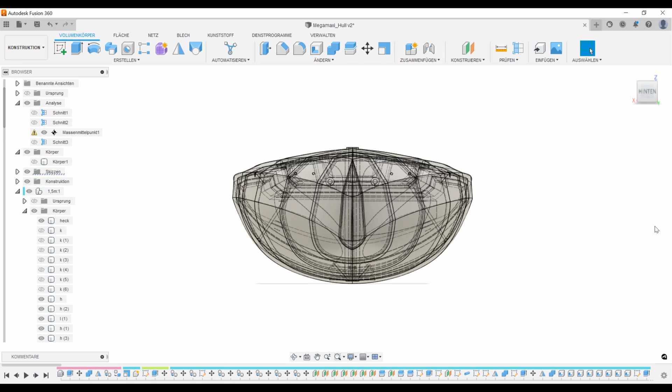In this video I will go into detail of a smaller scale version of the Klassen 180 at 1.5 meter length, ready for 3D printing on a regular 350mm diagonal 3D printer. I will go into detail how to calculate the displacement of this hull and what to look for in a perfect 3D print.

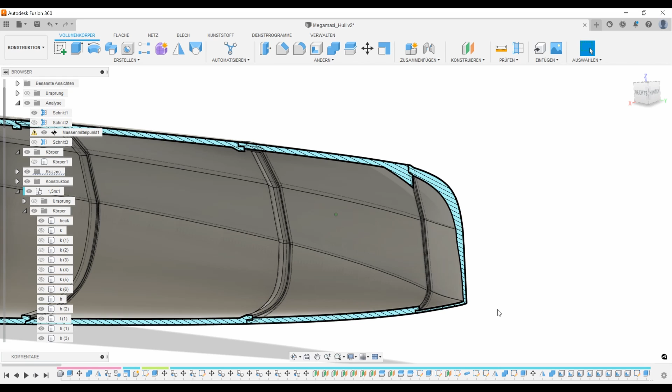I had rigidity in mind, so the bow section is a little thinner so we can backfill with a composite, like epoxy putty or something with fibers included. I want everything to be super easy to print and super easy to assemble, so the second section fits perfectly into the bow section. We can then bond a plate onto this surface, which gives us the security of a crash bulkhead. Further down the hull, I've addressed the common issue of overhangs by adding a little chamfer onto our bonding area.

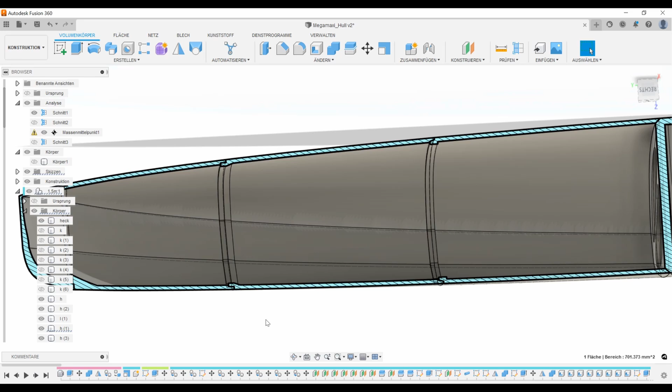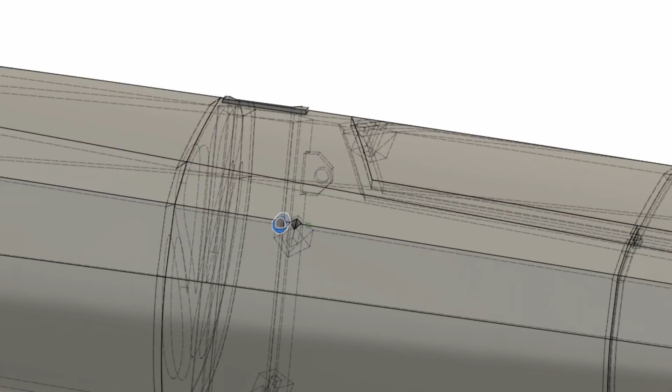The next section of the hull bonds to the main structure with a main bulkhead where the mast sits, and we have a little different connection. Also added are these round and square tubes to insert carbon fiber rods and tubes, which will later give us enormous rigidity for this hull. These protruding areas also act as mounting points for the hardware for the stays. This main bulkhead and the stay area indicate that we are in the middle of the boat.

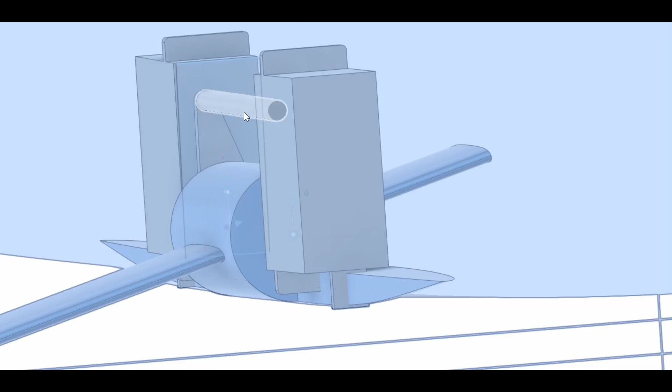A little frustrated from other designs, I thought let's give this boat a flat surface where we can mount every keel option out there. This flat surface, ready for mounting every keel option out there, should give us the opportunity to develop canting keel systems and put higher and higher loads onto those hulls.

Speaking of load distribution, just in front of the main sheet post we have these three posts that support the deck structure from shifting left to right. On top of the deck we also have a recess where we can place a carbon fiber plate to further reinforce the deck structure in this area.

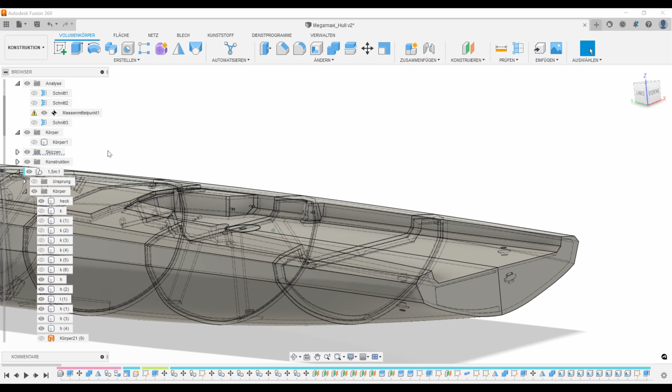Coming from the main sheet, we go to the steering system. In the rear of the boat we have two holes ready for the rudder stocks. Twin rudders? Yes, because it looks good. We can add T-foils to the rudders because this boat is supposed to foil. Some experience and the help of computer-aided design gives me the chance to already include the penetrations into the 3D model that we'll need for the steering system.

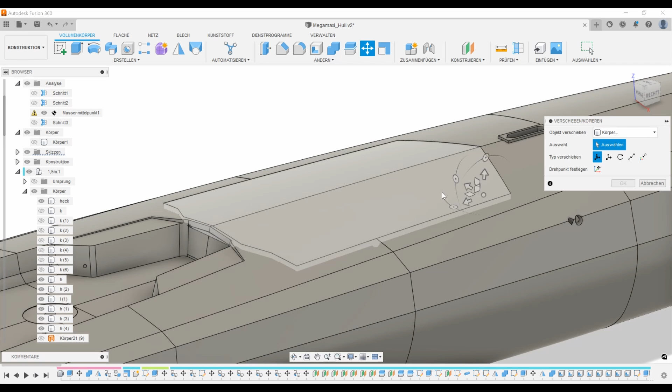Peeling back the tape, we can open the hatch and have access to all our servos. I was always freaking out about narrow hull openings, so I'm pleased that we have plenty of space to fiddle around and work with a cool mounting plate. Another reason I wanted such a big opening is to have access to the main structure.

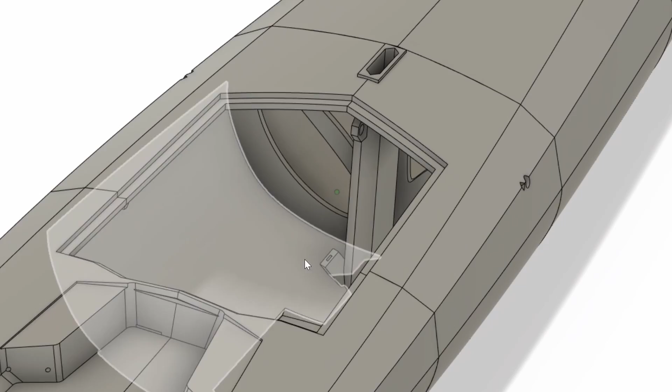This gives us the opportunity to build a canting foil system on the left and right of the boat. It has always been my dream to have a hull that we can work with, that we can experiment with, and there are endless capabilities. Including the base plate for the steering servo is always a great thing - this saves time and completes a well thought through boat.

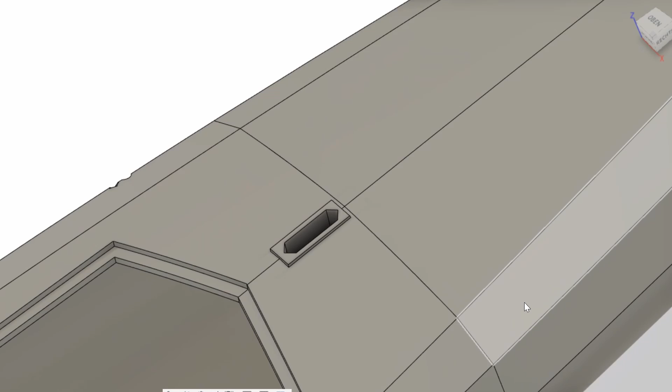Above the waterline is the rigging gear. It has always been a challenge to build the best mast - to make it stiff and strong and yet as light as possible. This mast box can still be modified, is currently 10mm wide, and gives us the chance to build whatever we want. I will cover the whole mast building process in detail in one of the next videos.

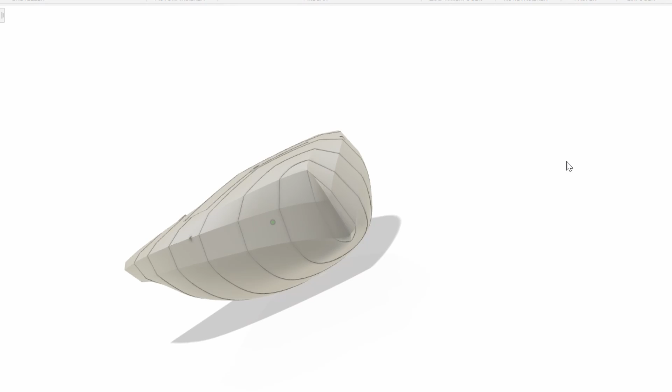As well as manufacturing techniques, the shape of a hull has also changed over the years. This quite modern shape still displaces some water when sailing slow. How much water is easy to calculate with Fusion 360.

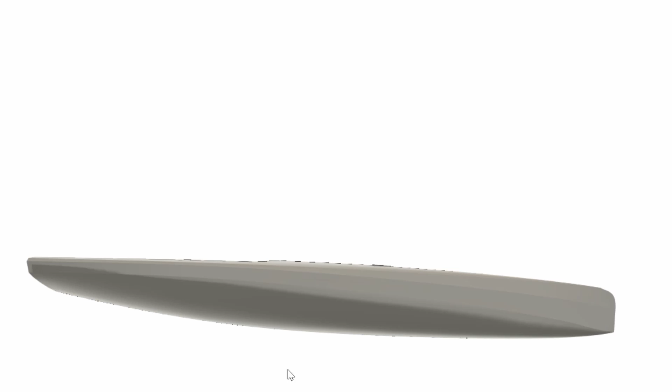To give you a better understanding of the whole hull shape, we go back to Sub-Zero. I want to tell you why this hull looks like it looks. I wanted to have the bow section high up and also the transom as high up as possible. This makes the boat really lively.

No gain without drawbacks, so we have to do a separate video on hull design in the future.

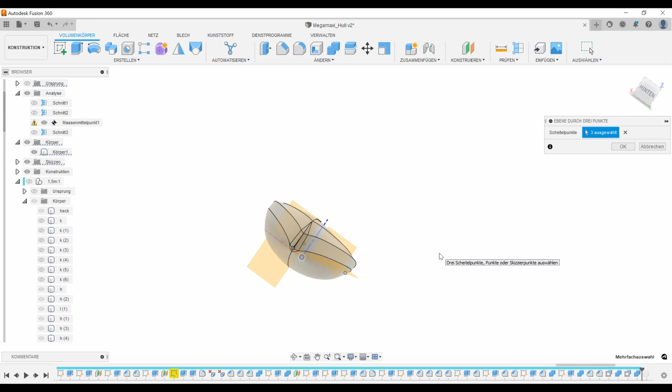Let's make a construction plane through 3 points. And here comes the trick: this gives us the waterline when the boat is heeling. We can now cut our body and calculate its volume, and therefore its displacement. This is what the waterline looks like from the top.

We definitely have to talk about it, but in a future video.

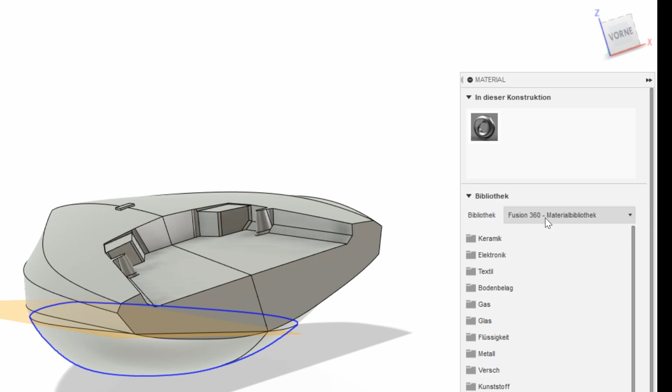We can now see, by right-clicking onto our part, the properties and therefore its volume. Let's change the density from steel to water. Change the material to water and also press A, go to liquids, and change the appearance to water. By now you can probably see where this is going.

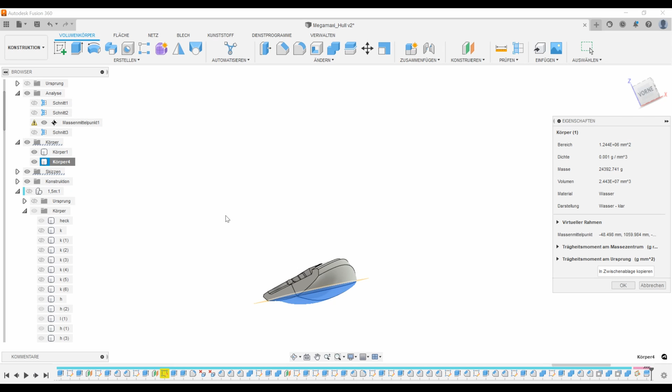Let's have a look at the properties of our selection. We have a density of 0.001 grams per cubic millimeter, and therefore a total mass of 24,000 grams. Remember, this is our Sub-Zero project, so it's 1.5 meters long. If we would build this boat with this geometry, it would weigh 24.39 kilograms—this would be the exact water displacement and the exact waterline that we would achieve.

With everything in life there's a big drawback: we haven't considered that this boat is flowing through the water, so it will create some waves. And here comes hull speed and wavelength into play.

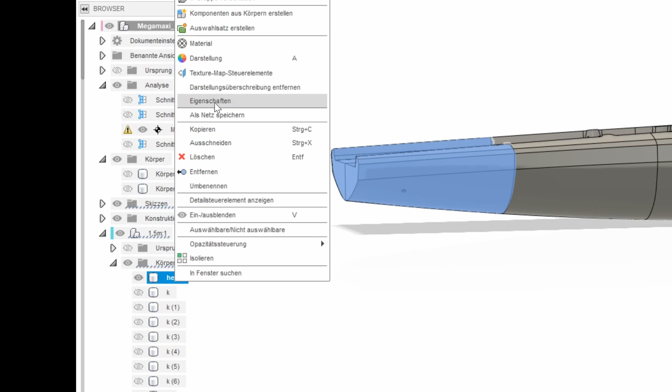Let's continue with our printable boat. With this method of changing properties, you can also evaluate the volume and the material you will need to print the whole boat. For example, for this rear section, we go to Material, say it's water, press A to show it as water, and go to Properties to check its volume.

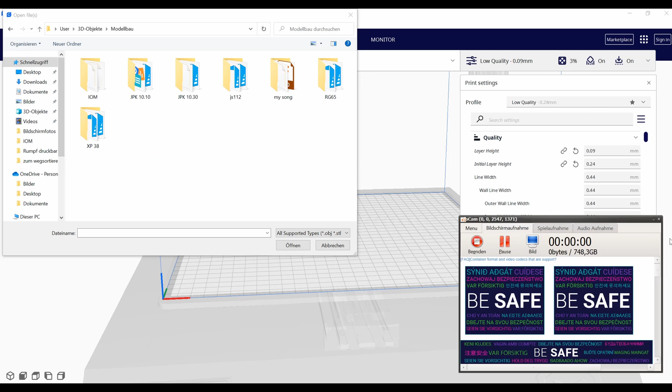Right now we have 1200 grams, that equals 1200 cubic centimeters of filament needed if we would build it in full. But as you have probably guessed, we will build it with an outer and inner wall and some infill, so we will end up with a different amount of filament needed. In this case we have 573 grams of filament.

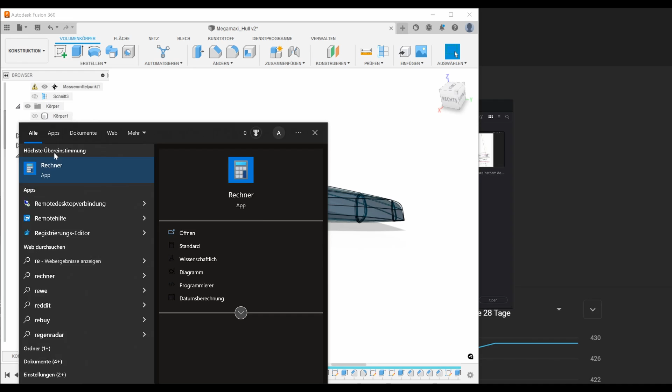Because printer settings can be pretty tricky, I usually calculate the whole volume of all my printed parts and see how much effect it has to change maybe from one outer wall to two outer walls, and to change the infill. And sure enough, a video about printing and building this boat will come for sure.

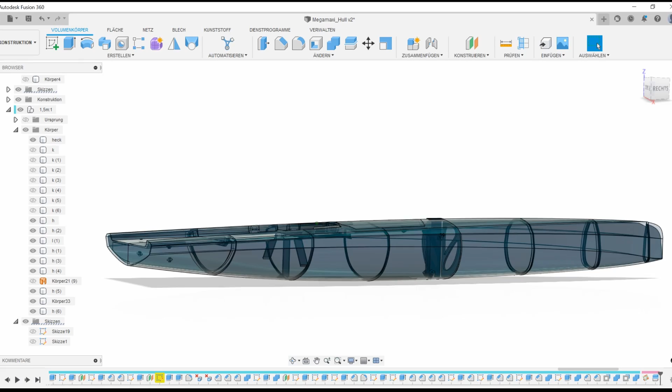Our volume of the printed parts is right now 5.7 liters. We have to reduce this as much as possible to save as much as possible. I estimate a total weight of 0.25 relative to its water volume. That equals, for this 1.5 meter hull, around about 1.5 kilograms in total. Not too bad, and this gives us plenty of opportunity to make it stronger, lighter and faster.

All parts need to be bonded and we have some carbon fiber reinforcement, so the next episodes will be pretty exciting.